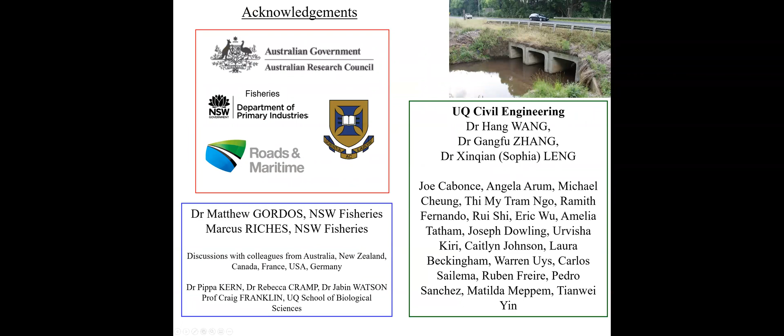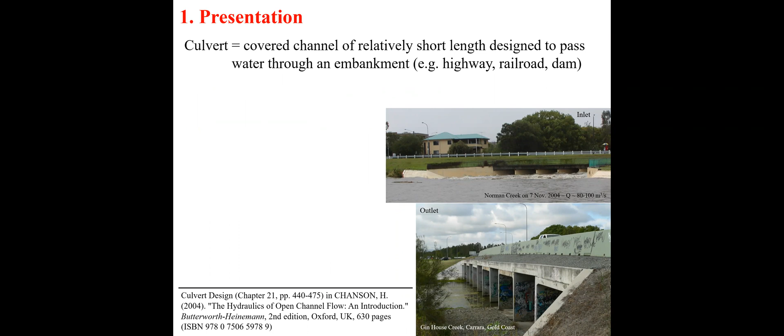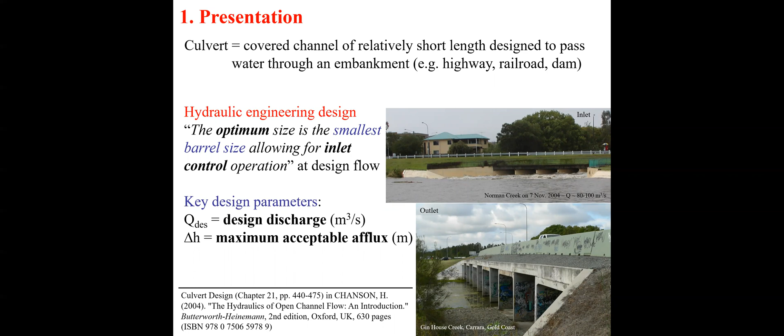Here is the overall talk. Starting from the beginning, a culvert is a covered channel designed to pass water through an embankment. From a hydraulic engineering perspective, the design is an optimization process, selecting the smallest barrel size, the narrowest part in the culvert, allowing for inlet control operation, with key design parameters being the design discharge and the maximum acceptable afflux, the afflux being the rise in upstream water level induced by the presence of the culvert. There are many kinds of culvert as illustrated on this photograph, but for the purpose of this talk we shall focus on standard box culverts as seen on the bottom photograph.

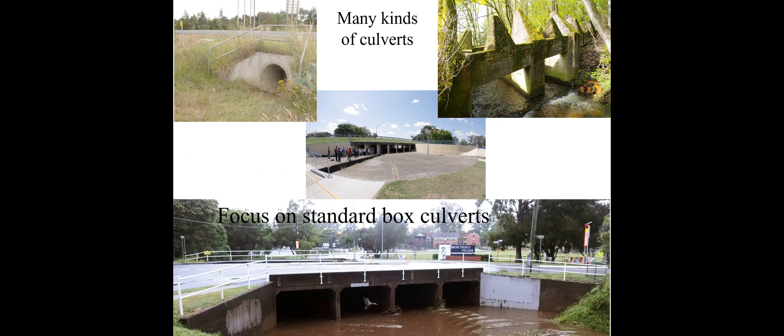It has been recognized for the past 3 to 5 decades that culverts adversely impact fish passage for a range of parameters, including excessive barrel velocity, the length of the culvert, insufficient depth, standing waves on the inlet and outlet, and debris, all closely linked to the species and their swimming performance. Within the context of this talk, we shall focus on small body mass native fish species commonly found in Eastern Australia, with a total body length of less than 100 to 150 millimeters and a characteristic fish swimming speed from less than 0.3 to less than 0.6 meters per second. Here's a video showing a small Duboulay's rainbow fish swimming against the current in a channel equipped with large bottom and sidewall roughness.

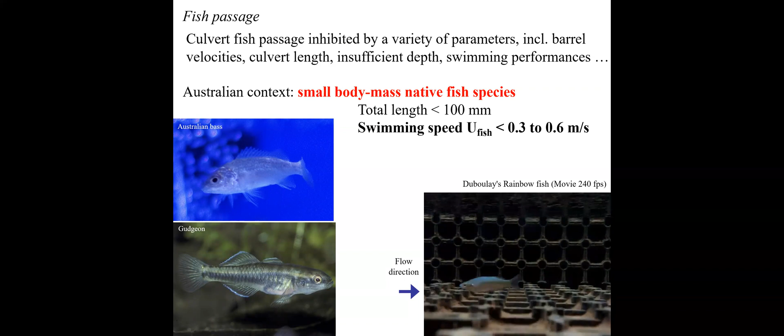Australia is characterized by a wide range of flow conditions, and at design flow conditions it is quite usual to have in the barrel some bulk velocity, cross-sectional average velocity, in excess of 1.5 to 4 meters per second, well in excess of the characteristic fish swimming speed of these small native fish species.

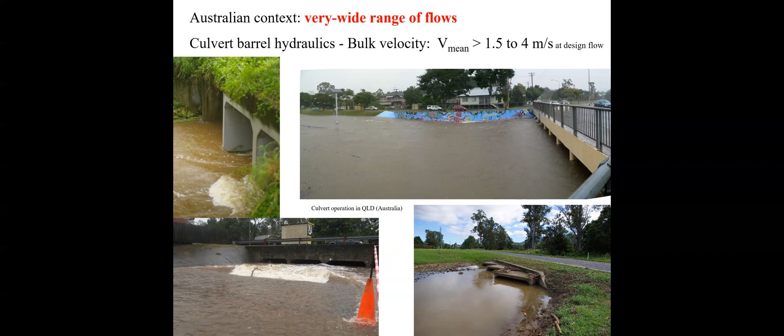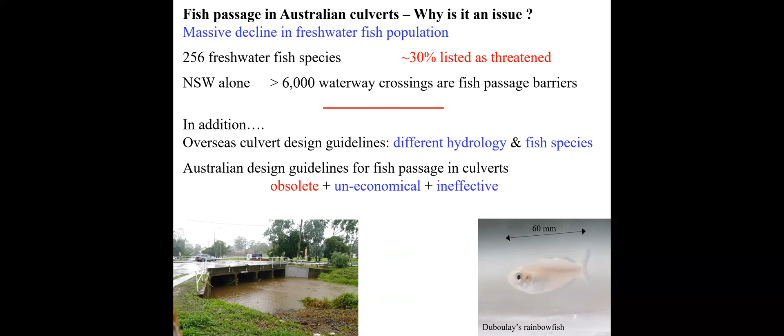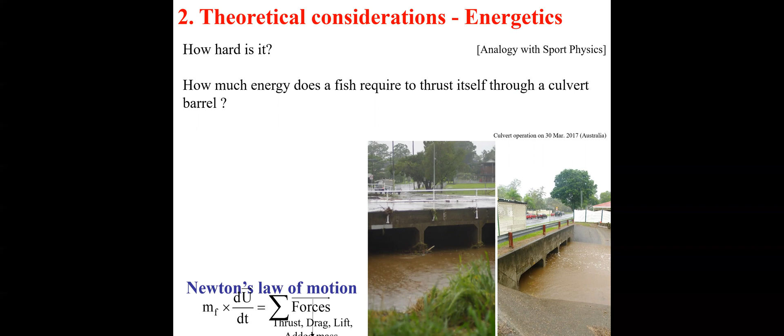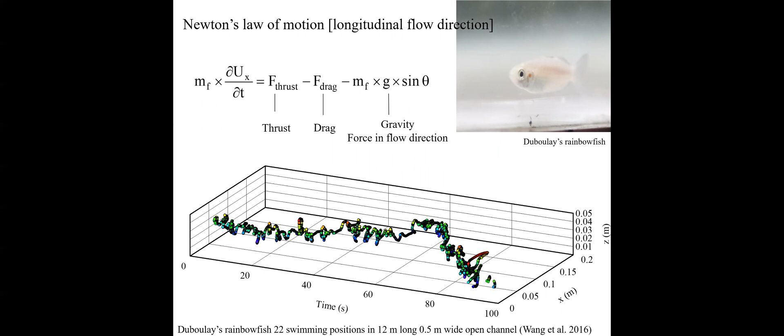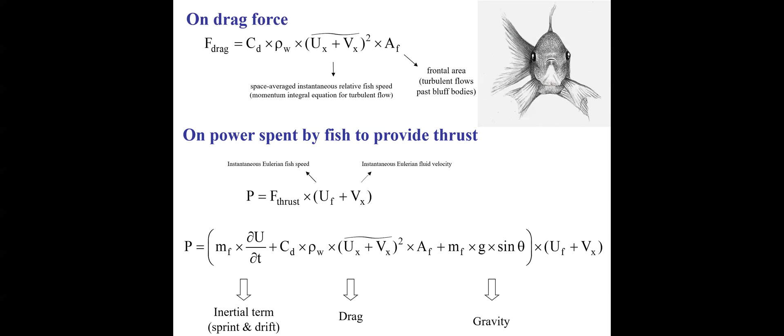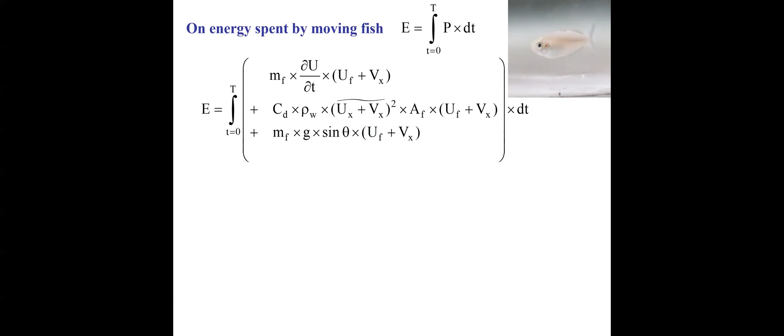Some of the key outcomes of this basic consideration, based upon classical sport physics, suggest that fish will minimize their energy expenditure by swimming in low velocity zones, because the rate of work is proportional to the cube of the velocity, and the energy spent is proportional to the cube of the velocity times the transit time. Fish will minimize sprint and drift. We may expect that fish negotiate a culvert barrel by using local turbulence to follow continuous, interconnected, low velocity zones. These concepts are fundamental to weak swimming fish species, not just Australian fish species.

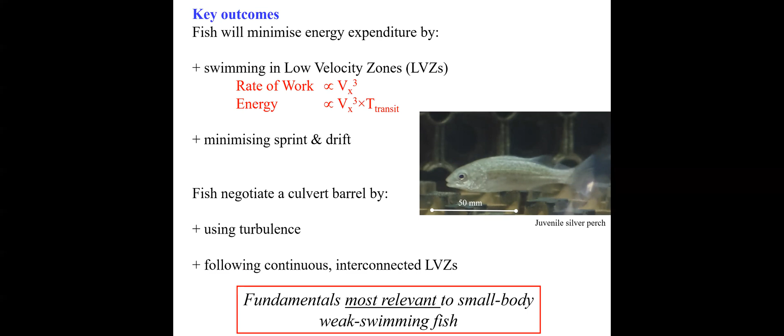Another theoretical consideration is based upon dimensional analysis. When looking at the hydrodynamics of a turbulent open channel flow, we can develop a relationship between the water depth, the velocity of the fluid, the pressure, and the turbulent length scale as a function of the location X, Y, and Z within the channel, and the boundary condition, inflow condition, and fluid properties. This is limited, but it gives us a general idea.

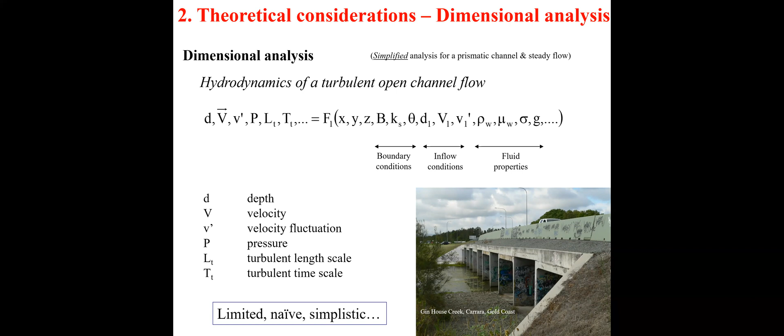Using the Pi-Buckingham theorem, we can derive in dimensionless form a relationship between the dimensionless flow properties as a function of the dimensionless location and a number of key dimensionless numbers, among which one may recognize a Froude number, Reynolds number, and Morton number. In practice, open channel flow, including culvert hydraulics, would be modeled using Froude similitude, implying that in the model the Reynolds number will be much less than in the prototype, especially when dealing with small or very small physical models.

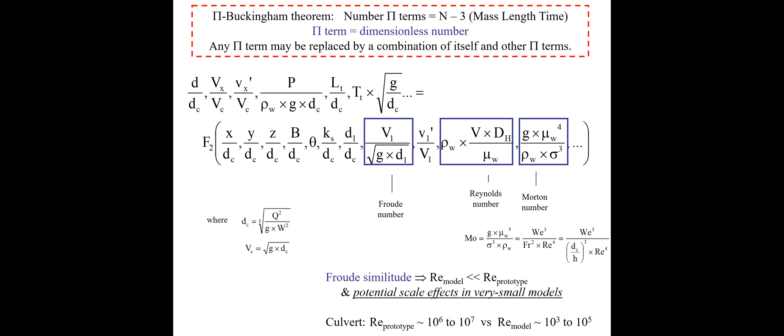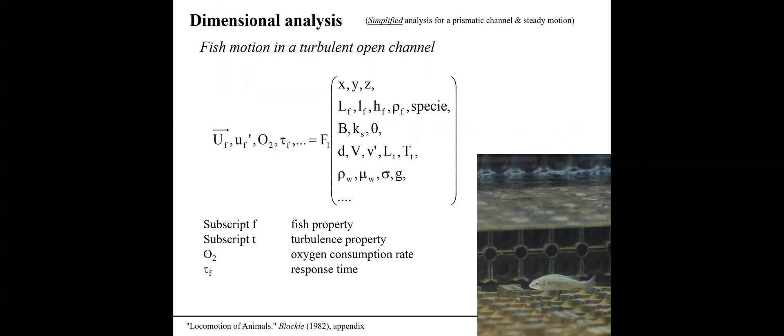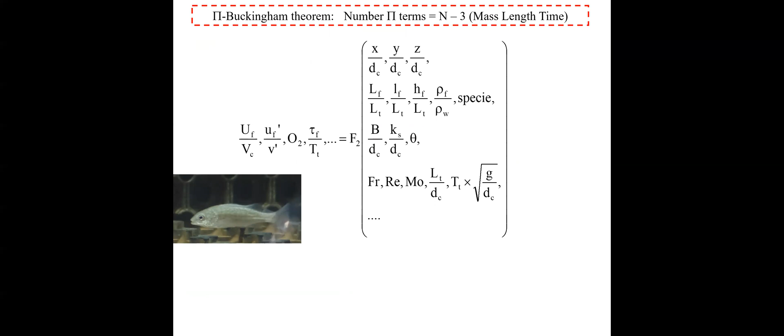We may do similar reasoning in terms of fish swimming, by linking the fish swimming speed, the fish swimming speed fluctuation, oxygen consumption, and response time of the fish as a function of the location, fish characteristics, boundary condition, turbulent flow, and fluid properties. Using the Pi-Buckingham theorem, we obtain a series of dimensionless relationships showing in particular some key parameters, such as the ratio of the fish length scale to turbulent length scale, as well as the species.

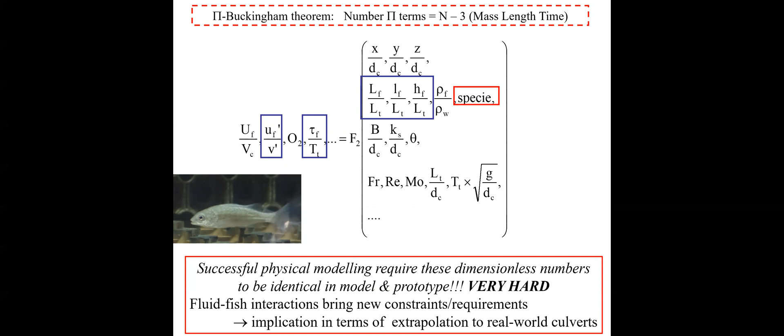Altogether, it is nearly impossible to fulfill dynamic similarity on identical dimensionless numbers unless working at full scale or near full scale. This means that any physical modeling has to be undertaken at near full scale characteristics to be relevant to real world events. So, in summary, small scale physical modeling is meaningless. We need to use large, sound physical modeling at near full scale, and we need also field work.

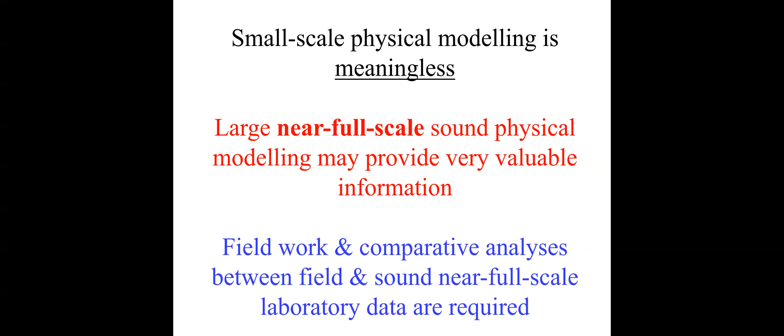In terms of modeling, we can conduct some physical modeling, and we have done so in some 12-meter long, 0.5 meter wide channel, which is near full scale, with different types of boundary conditions, ranging from smooth channel to rough channel on triangular corner baffle, small triangular corner baffle, with a detailed amount of hydrodynamic measurements, including velocity and turbulence measurement using Prandtl-Pitot tube, Preston tube, and acoustic Doppler velocimeters.

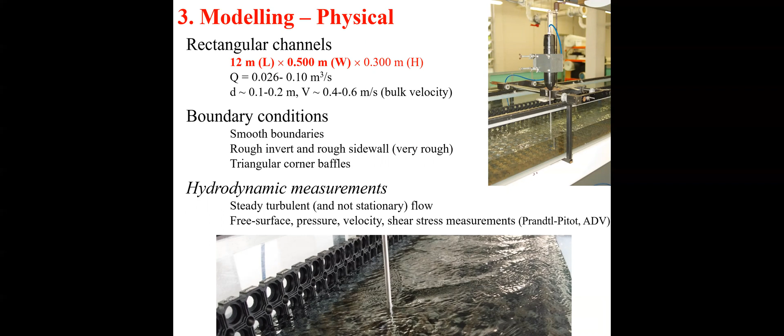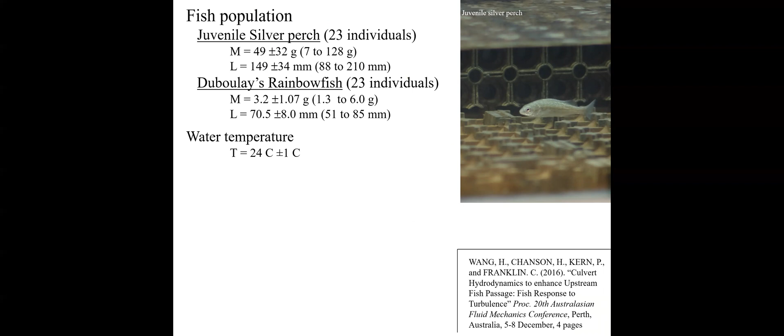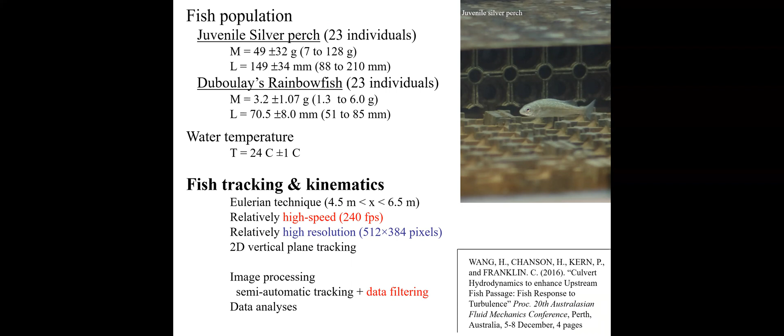We have, in addition, performed some kinematic record of the number of fish motion using two fish populations, juvenile silver perch and Duboulay's rainbowfish, and using high-speed video, 240 frames per second, we are able to get a large amount of information on fish kinematics. An example is shown here.

We are looking here at a small Duboulay's rainbowfish, as seen in the video, swimming against the main current. The video is a 1/8 speed replay. The graph here shows in blue the fluid velocity fluctuation, that is a histogram of fluid velocity recorded at high frequency, 200 Hz, while in red we show the fluctuation or histogram of fish speed. What we find is that basically the fish speed fluctuations are much less than the fluid velocity fluctuations at the same location under the same condition.

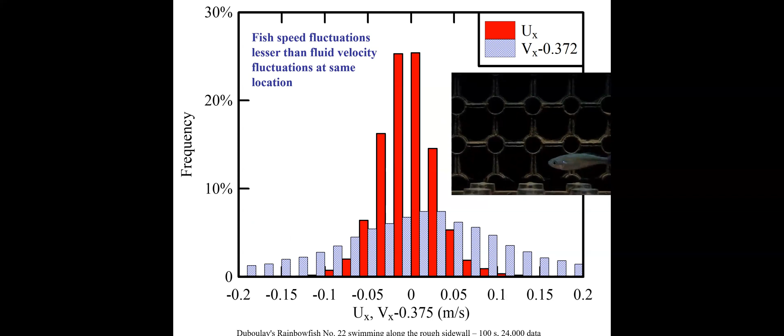Altogether, for a range of fish and a range of flow conditions, we can obtain some experimental data showing the ratio of the fish speed fluctuation to fluid velocity standard deviation, typically much less than 1 for two different species and a number of individuals for each of the species.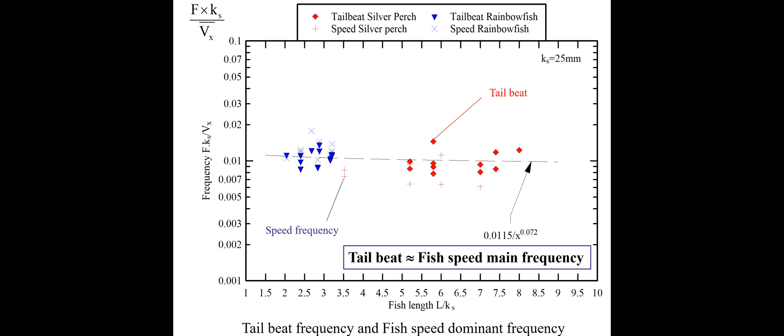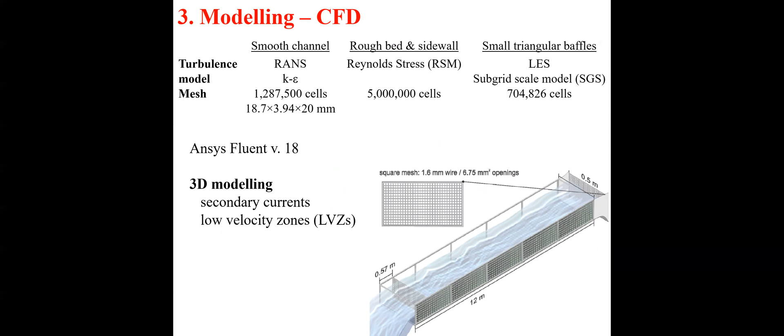Now, another form of modeling is doing numerical modeling, namely computational fluid dynamics modeling. There we use a commercial code, and depending upon the type of boundary condition, you use different numerical approaches, from Reynolds Averaged Navier-Stokes equations to large eddy simulation for more complex geometry.

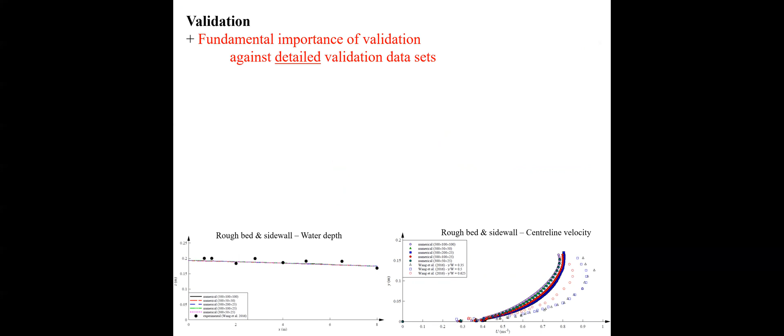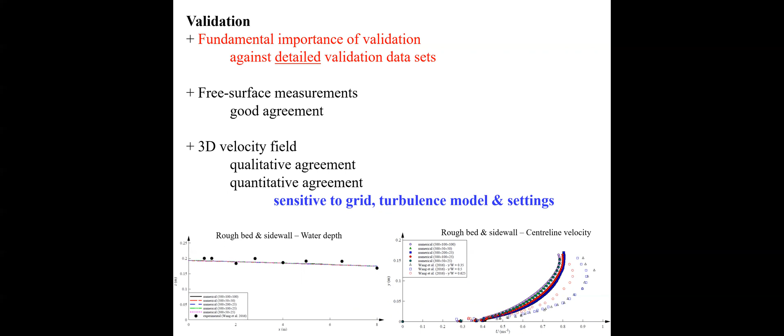Importantly, any numerical modeling requires solid validation, which implies detailed validation data sets. Based upon our own experimental data, we have been able to get good agreement in terms of the free surface observation, but we find that the CFD numerical models are extremely sensitive in terms of the velocity field, sensitive to the grid, to the turbulence model, and overall to the settings.

When properly validated, CFD can provide a large amount of information and can provide information on comparative performance of different conditions, and can provide insight into what we can expect in terms of fish behavior, like here, this juvenile silver perch, swimming in the bottom corner of a channel, trying to find shelter from the high velocity.

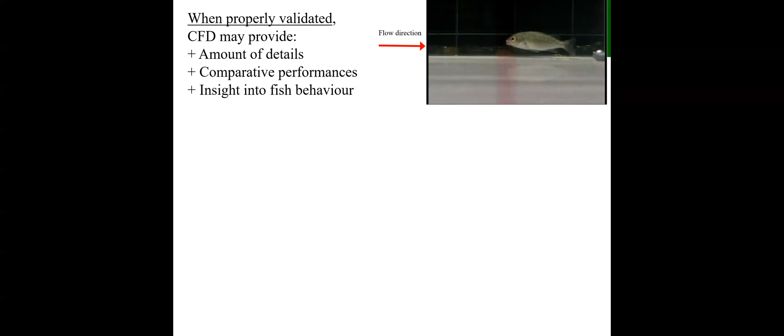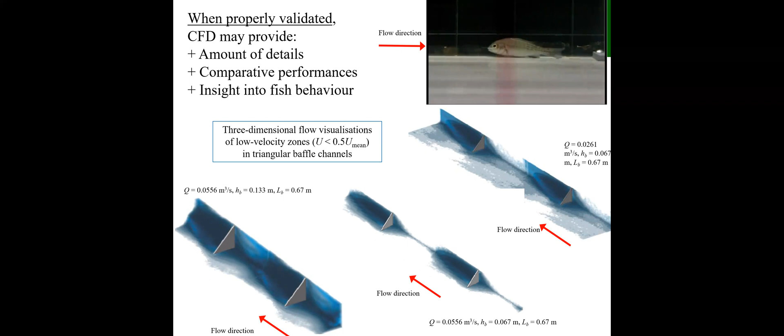Other examples of results are shown here. On this graph, we show the flow past small triangular corner baffles. The dark blue areas are low velocity zones. We see in particular that for the small baffles, the smallest baffles, there is a lack of continuity, interconnection between low velocity zones, which will adversely impact upstream fish swimming.

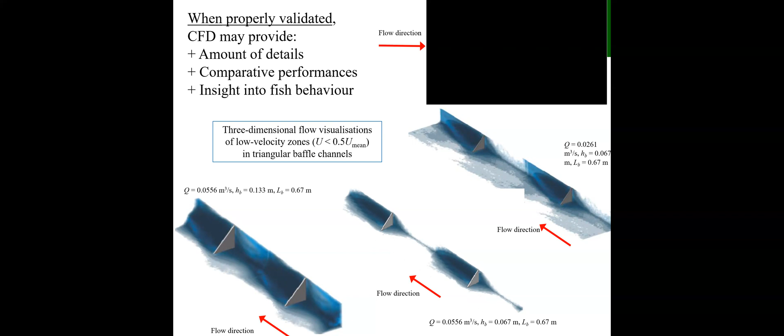Moving forward to developing guidelines, we have a conundrum. On one side, we want to minimize the barrel size in terms of the hydraulic design to minimize the cost of the culvert, but biological requirements suggest that we need much lower velocity in the barrel.

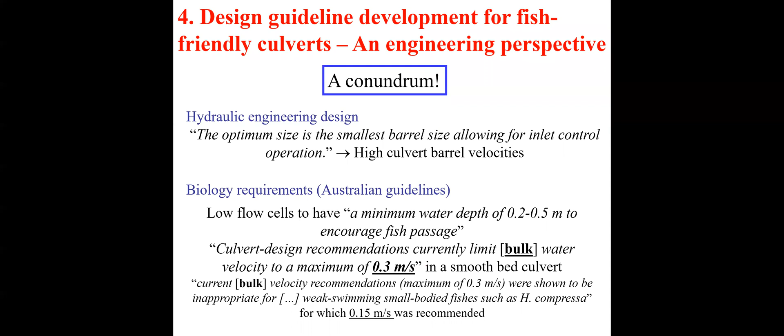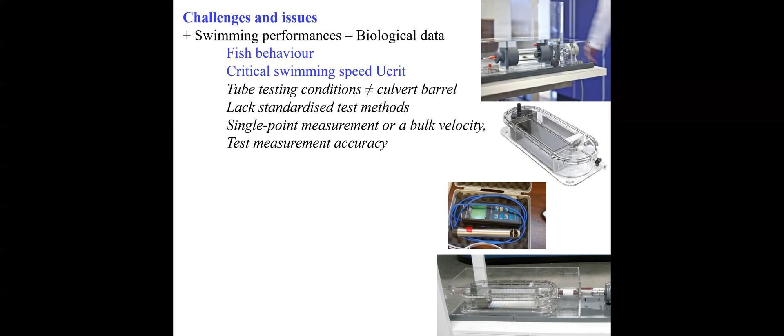Some of the challenge is that on one hand we have biological data providing good information on fish behavior and characteristic fish swimming speed, but this test is usually conducted in very small facilities, often with a lack of standardization. They are often single point velocity measurements, which don't provide a complete velocity field, and sometimes there are issues with measurement accuracy.

On the other hand, hydraulic modeling provides very detailed information on the velocity field based upon advanced physics-based theory, but traditional hydraulic modeling does not provide information on fish behavior.

So what can we do about it? We can spend a lot of money. That's what happened in this bottom structure, a culvert that has been retrofitted for a cost of nearly $120,000, with a reduction in discharge capacity.

Or we can try to tackle the challenge head-on by bringing together biology and engineering, rather than biology versus engineering. And there, professional engineers have to be much more proactive.

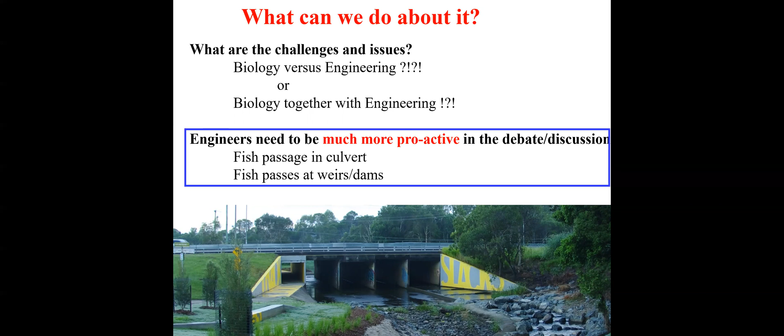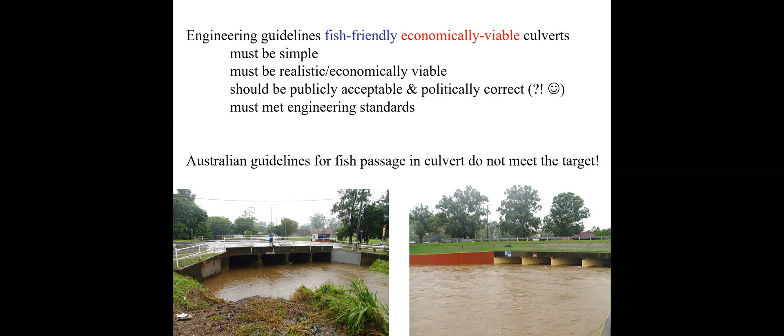So we need engineering guidelines for fish-friendly culverts that are simple, realistic, politically acceptable and publicly acceptable, and that meet engineering standards.

We propose to focus on the fact that fish will swim as soon as there is some water. And if we could maximize the conditions for fish swimming most of the time, we may hopefully achieve a successful design.

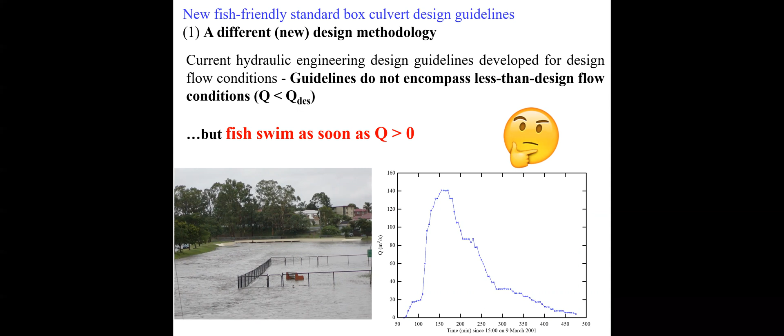So we need to adapt our design. One option is to set a threshold in discharge, below which we focus on fish passage and above which we focus on flood capacity. Another approach is to look at the duration of the flood event. Altogether, both approaches tend to yield similar outcomes, especially in terms of Australian hydrology.

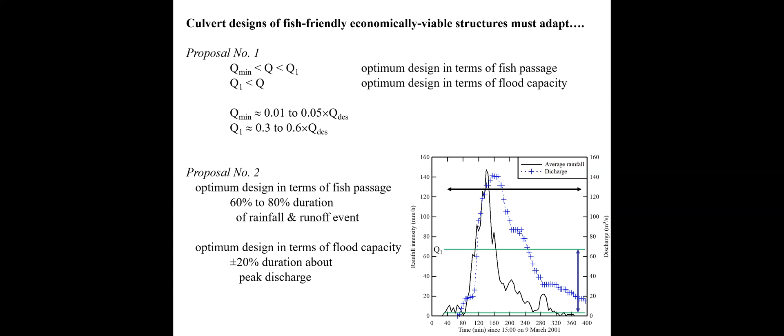And then we need to match fish swimming performance to hydrodynamics.

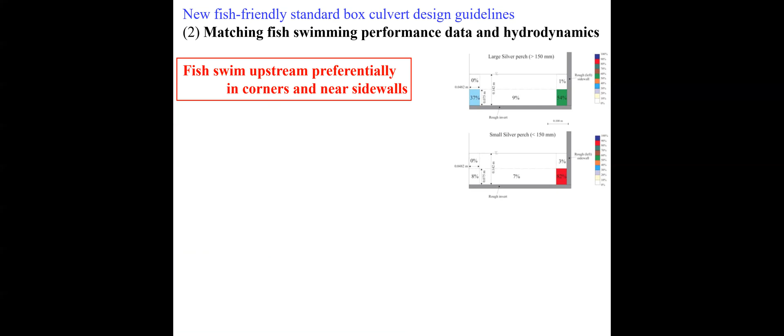The small graph shows information on fish behavior in a channel with a rough sidewall, a smooth sidewall, and a rough bed. We find that irrespective of the boundary condition tested, fish swim preferentially next to the sidewall and in the bottom corners.

Hydrodynamics can provide us detailed information in this region, in this low velocity zone. And we propose, in terms of design, to match the swimming speed with the characteristics on the side of the low velocity zone.

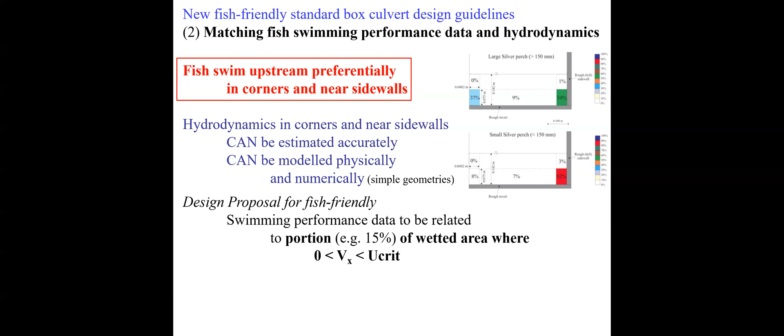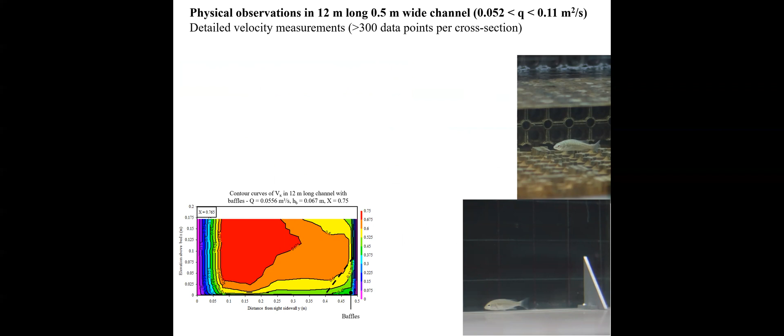Physical observation, like this bottom graph showing the velocity map in a channel equipped with bottom triangular baffles, highlighted with dashed black lines, enables us to calculate very accurately the size of the low velocity zone. For example, for the same flow condition, in a smooth channel, we have a low velocity zone of about 7% of the cross-section area.

When we have a rough bottom and a rough wall on one side, we can get about 17% of the cross-section area corresponding to low velocity zone. And when we use small triangular corner baffles, we're able to achieve between 10 to 25% of the cross-section area characterized by low velocity zone.

So some key outcomes: current guidelines in Australia are obsolete. We propose a design optimization in terms of fish passage at less than design flow and flood capacity at design flow condition, focusing on providing low velocity zones. This approach is valid not only for smooth box culverts, but other geometries.

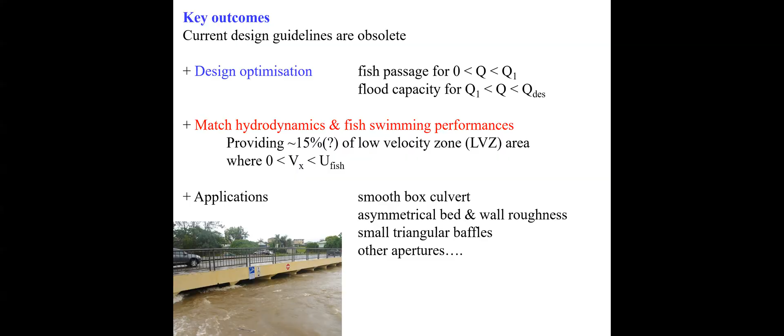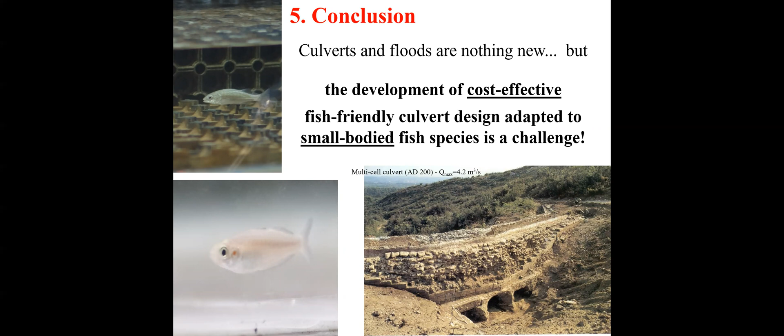So in conclusion, culverts and floods are not new, but the development of cost-effective, fish-friendly culvert design adapted to small body fish species is a major challenge.

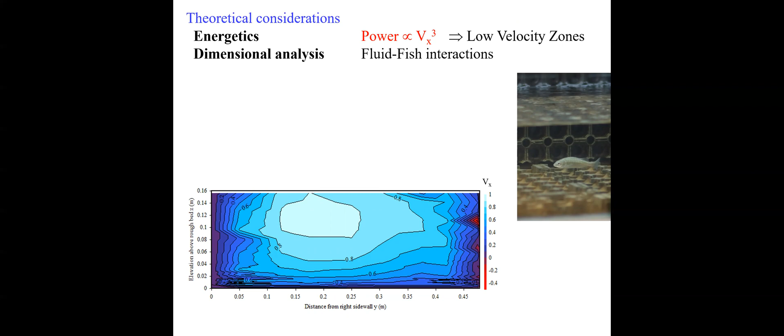Theoretical consideration emphasizes that fish spend power at the rate of the cube of the velocity when swimming against the current, so they will seek low velocity zones. Dimensional analysis emphasizes the complexity of fluid-fish interactions.

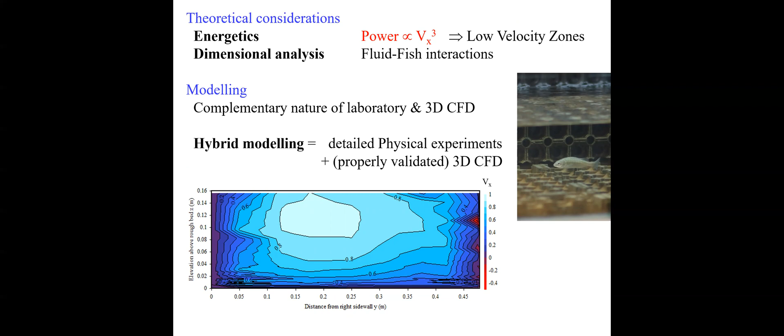We can use both laboratory and numerical models, and we believe the future will be hybrid modeling, combining both physical and numerical experiments, provided that the latter are properly validated.

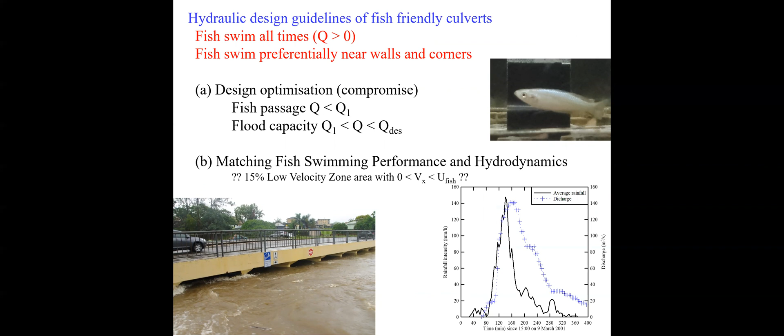We propose new design guidelines focused on the fact that fish swim every time there is some water in the culvert, keeping in mind that fish, especially small fish, will swim preferentially next to the wall and in the bottom corners, with design optimization for fish passage at less than design flow and flood capacity for large discharge near design flow condition, by matching fish swimming performance to low velocity.

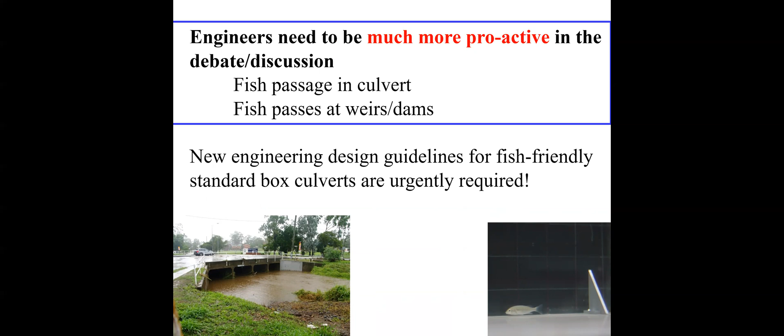We need to be more proactive, and there's an urgent need for new engineering guidelines for fish-friendly standard box culverts.